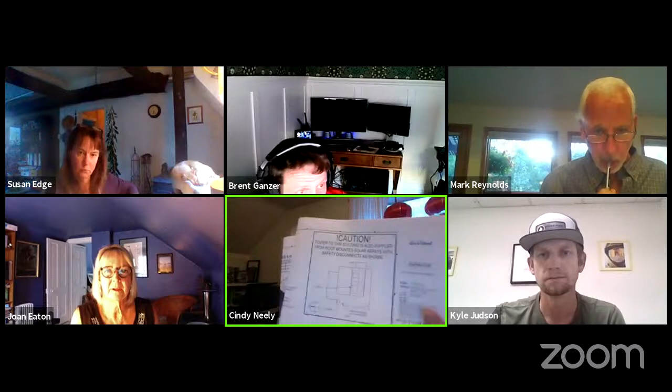I've got it in a PDF. Okay, can you share it for us? Sure. Mark, are you referring to this? Yes, second page of that, let me share screen. Oh, you got it.

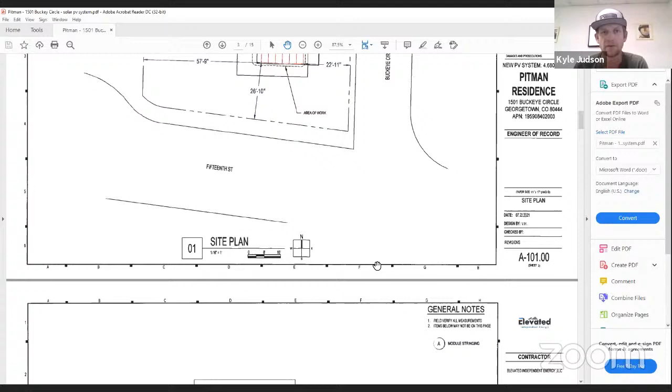Jay, are all of these flush, I realize they have to be raised slightly, but are they parallel to the roof surface and close to it? Yes, it's a fixed flush mount, so it'll match the pitch of the roof, sits about 3 to 4 inches off the roofing material. And are they dark with a matte finish? They have a black frame and black cells, yes.

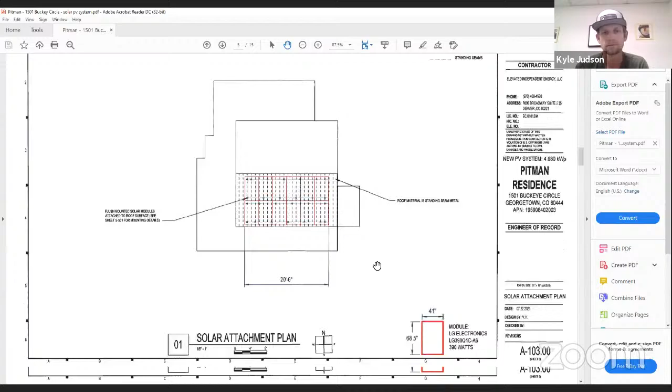Tell me if there's a certain page you want me to stop on here. Just the site, right there, that D1, yeah, right, that shows the pitch and everything.

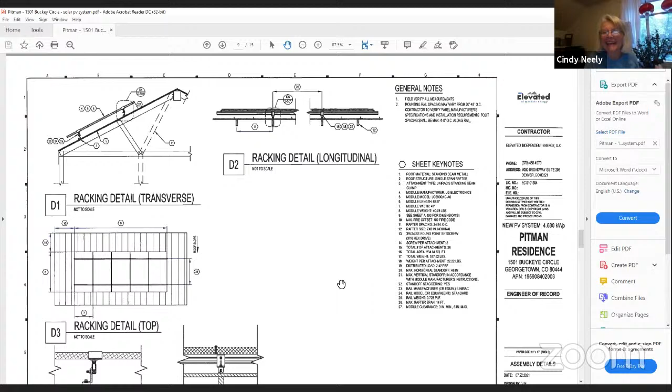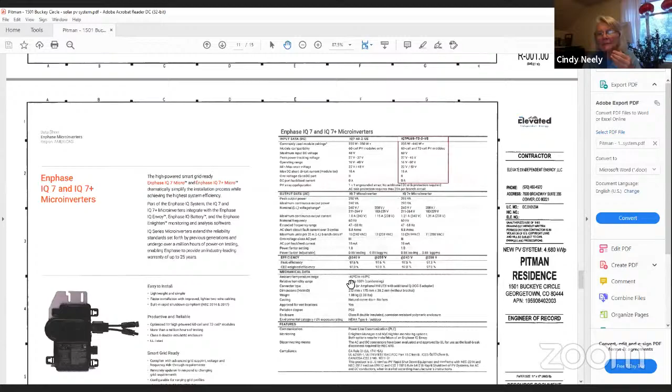Guidelines indicate we should try not to put these on the front of houses. This house essentially sits on a corner. The south side faces 15th Street. Correct.

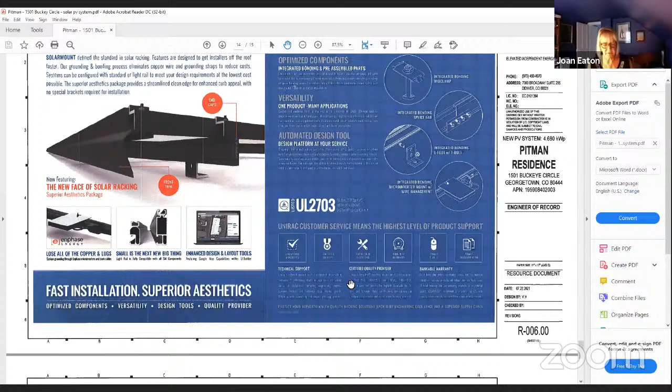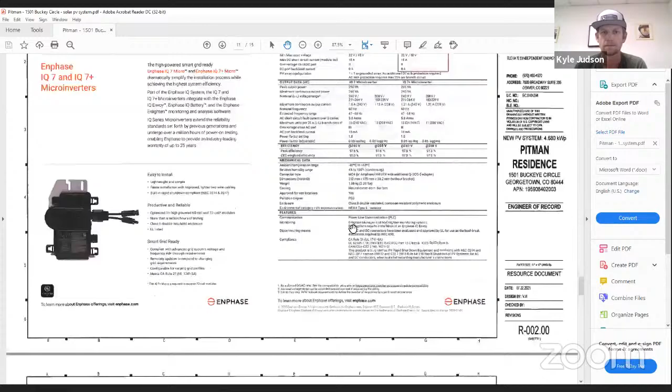But the actual roof is fairly flat, correct? It is, I believe it's only about a 10-degree pitch, maybe even lower. So being on top, you really won't be able to see it well, because you have that long mansard look around the second floor of the house.

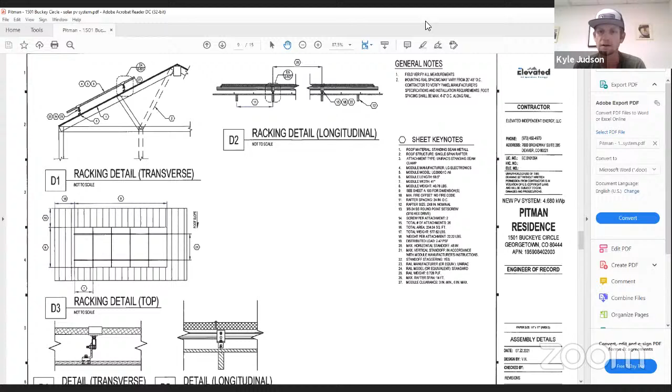And they're going to be put flat to the roof, is that what I heard earlier? Yes, that's correct. Looking at our plans, it's a 1-in-12 roof pitch, so that's actually only 3 degrees, nearly flat. So it'll barely be visible from the street at any angle then. I would think so. It would tend to be more visible from 15th Street. It's not going to be visible at all from Buckeye.

But the house faces Buckeye, essentially it fronts Buckeye. Yes, it's just that its side yard happens to be right alongside 15th Street.

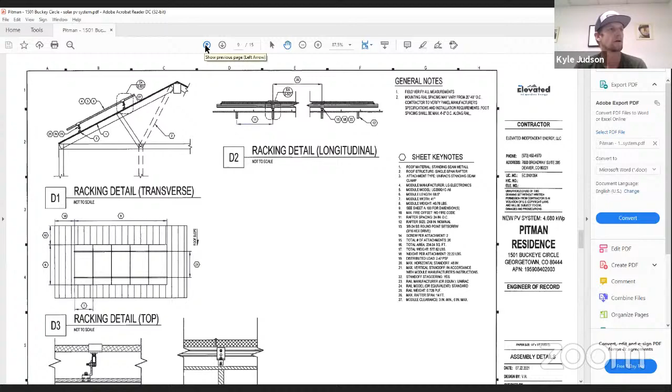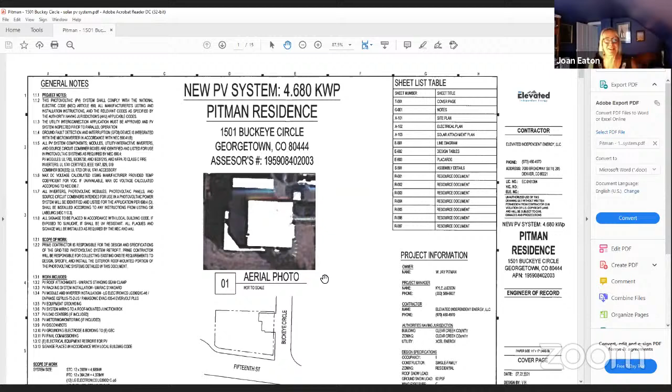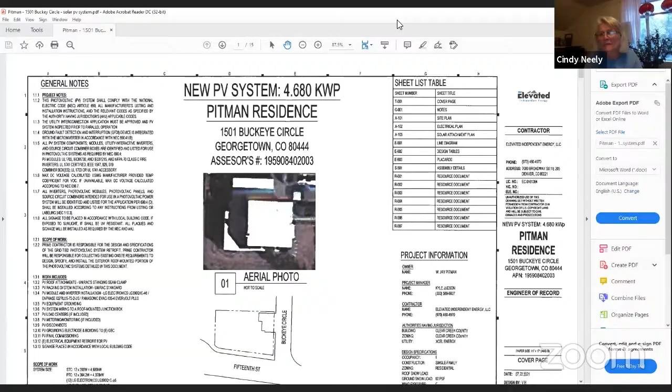The roof is a dark colored roof at the moment. I believe it's actually off-white, I can look at our photos here. Yeah, you can't see it from the street because of the mansard part. So this will be better? It'll be dark. Yes, it's kind of a tannish cream colored standing seam metal roof. You don't see it at all though, from either street. No, you just don't see it.

How about we go to book 3, chapter 11, page 86. I think this is the only place we have solar in book 3. When I just had E, solar devices should not block views or detract from the setting. E1, it's attached to the building, flush with the roof line, which it is.

E2 - no, not E2. It talks about exposed hardware, frames and piping should have a non-reflective matte finish. That's the only reason I cited it. So are you saying B like boy or E like echo? Echo, E like echo.

Mark, how about A6? Yes, that's fine. We could do that instead of E2, that way we won't get confused that it's not attached to the building. So strike E2. That's all I had, I think that's all it is.

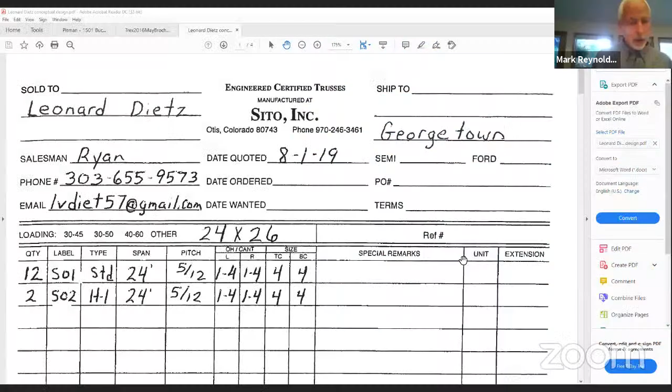I wanted to know if this would be something they could do. No, this isn't the log house, this is an existing house. I think they wanted -- well, we should let them tell us what they're going to do, so we can explain it. Kit, do you have the thing you can share with us?

Thank you. Apparently none of us have it in our package here. Okay. And it's Leonard -- I promoted you, you'll have to unmute to talk, Leonard. Okay, can you hear me? Yes, sir.

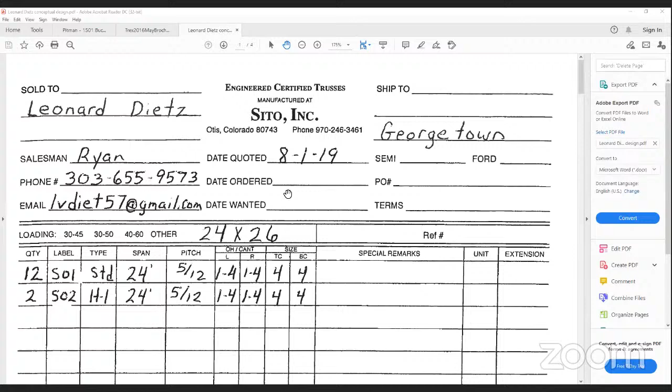Okay, it's actually for my mom's property. She's at 918 Taos, and she wanted to put a pitched roof on the garage because it's basically flat, and typically in Colorado, well, I've had leaking problems. So I thought if we could put a pitched roof on it, that would maybe help get rid of that problem. Okay, this is a concept.

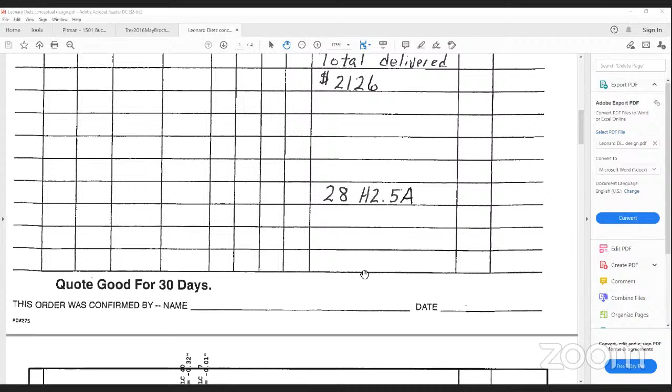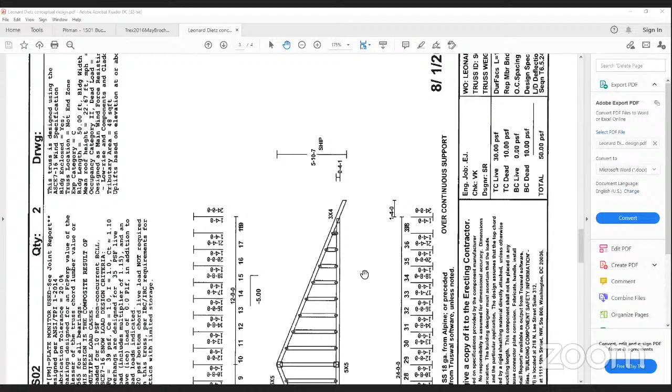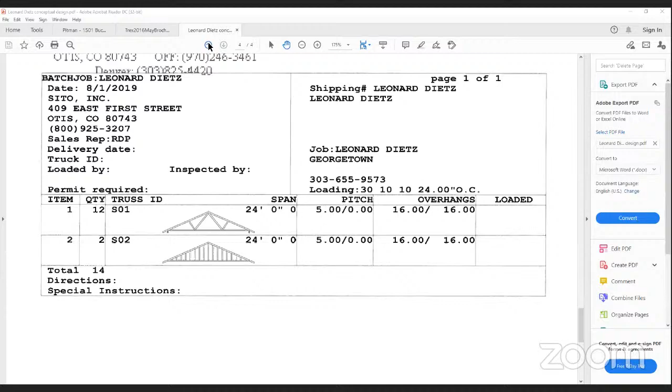Is there something on this that shows the house? No, the garage is in the back of the house, it's not attached to the house. It's attached to an old carriage house. So I was just going to match the trusses to the roof line of the carriage house so it would all look uniform. I was just trying to make sure before we go through all the issues that this is something that would be allowed.

So how big is the garage now? Oh, it's an oversized 2-car garage. I don't have the size off the top of my head -- it escapes me right now. Well, that's fine. Does the garage sit on Biddle Street? No, it sits behind her house on Taos Street, at the back of the property. I can't picture it -- I'm having trouble picturing too.

Do you enter from Griffith? Yeah. Okay, it enters from the back -- the garage door doesn't face Griffith, but it faces the house. So you don't have that visual with the garage doors, but you actually have to drive into the property to get into the garage. Is it next to Nancy Hale? Is that where we're talking? Yes, correct. So this is an accessory garage, not connected to the house. You can come into it by Griffith Street and it does have a flat roof. Yeah, that's the one.

And what kind of pitch are you considering putting on this roof? I'd have to look at what the truss company came up with. I don't have that copy in front of me. It's on my iPad here, so I can't access it. But we would do whatever is needed to make it work, basically.